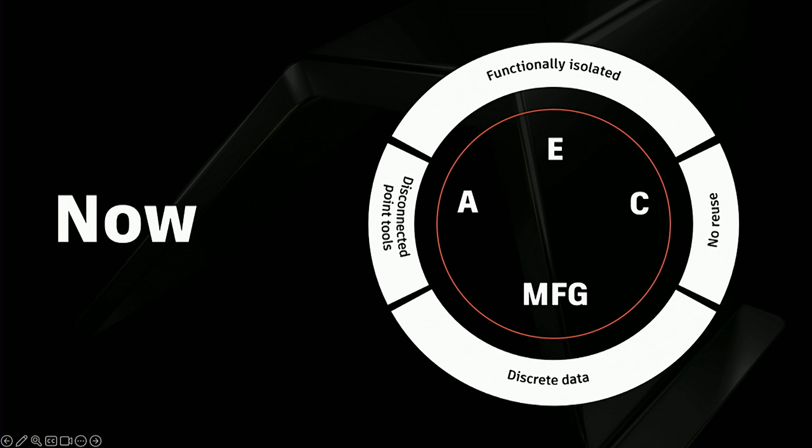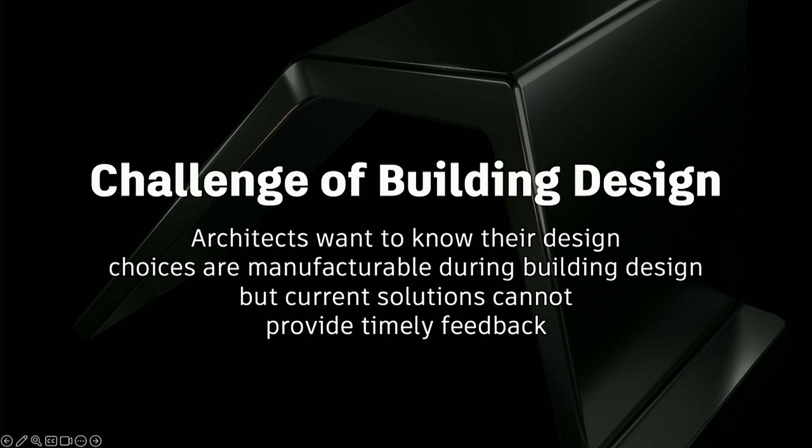We've also seen companies starting to adopt industrialized construction to overcome these challenges, but the modular construction industry has faced significant failures, and only some of the more resilient companies are still standing today. We see that some of them are struggling to make profit. So achieving scale is challenging, and architects aren't really adopting the design for industrialized construction principles. We think architects need to be equipped with the tool sets for industrialized construction in order to move IC on a broader scale.

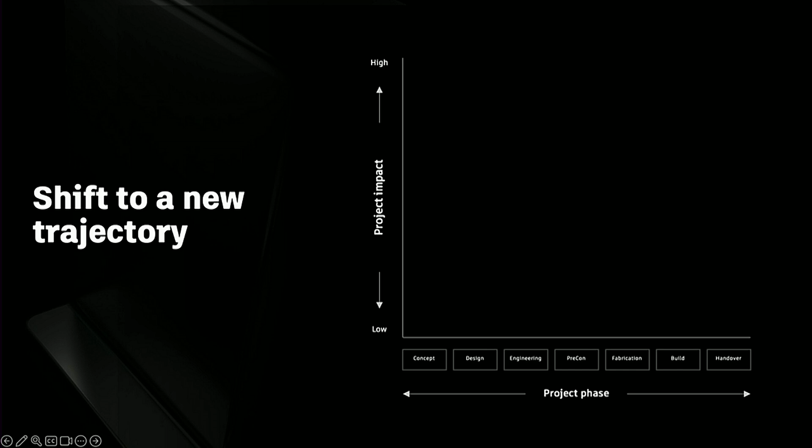With this, there is a need for a shift in our approach to the way we design buildings. Typically, if you look at the curve, the ability to influence design and building cost is high during the early stages of design, program definition, and conceptualization, and choices made during this stage typically make or break the project down the line.

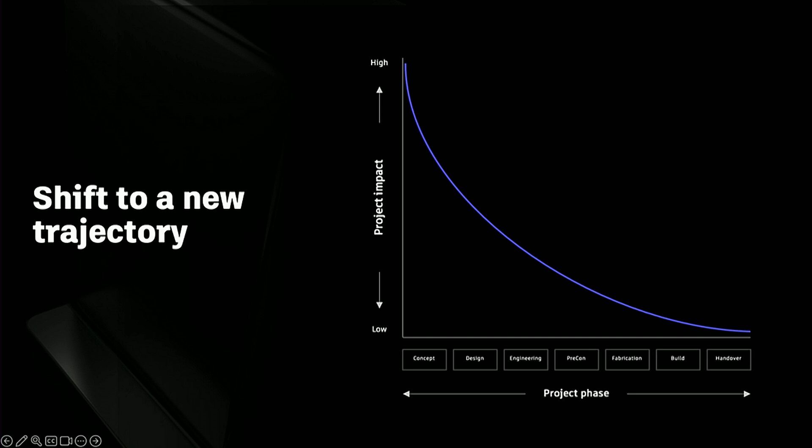The challenge with traditional building methods is that certainty is very low during design because every project is a blank slate and you're starting from scratch. Designers would typically capture design intent with placeholder content at the very beginning, and all the other details are authored much later down the pipeline, which would be complex or costly to change directions at that point.

However, with using industrialized construction, we can start projects with chosen suppliers and known manufacturable components and building elements. This is what we're calling productization. Productization allows architects to use components and make choices that are validated early on during the design process, and this has a downstream impact of eliminating manual, time-consuming processes and decision-making, because these tasks are performed with the components or the products in mind.

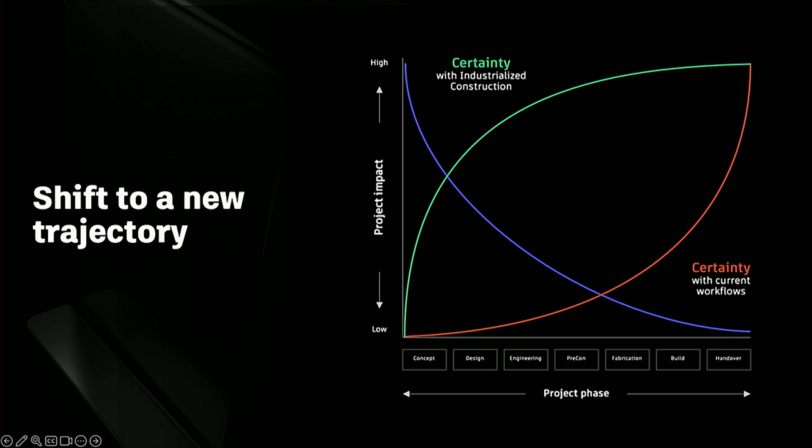So to just share our current landscape at Autodesk, how do we enable our customers to design with productization in mind? We have the Autodesk Informed Design Platform, which seamlessly connects the dots from product engineering to design customization, and finally to production outputs.

So the workflow essentially starts with the product engineer at the publish phase, where they create parametric models, set BIM contents and rules, and then publish the product for design use. And then it's transferred to the designer during the customize phase, where they adapt the product to project requirements, integrating them into the entire project and prepare them for production.

And then in the last phase, the production engineer finalizes project selection and generates the necessary information, so your fabrication models or documentation, bill of materials, shop drawings, and so on. And all of this is integrated in the Autodesk Construction Cloud.

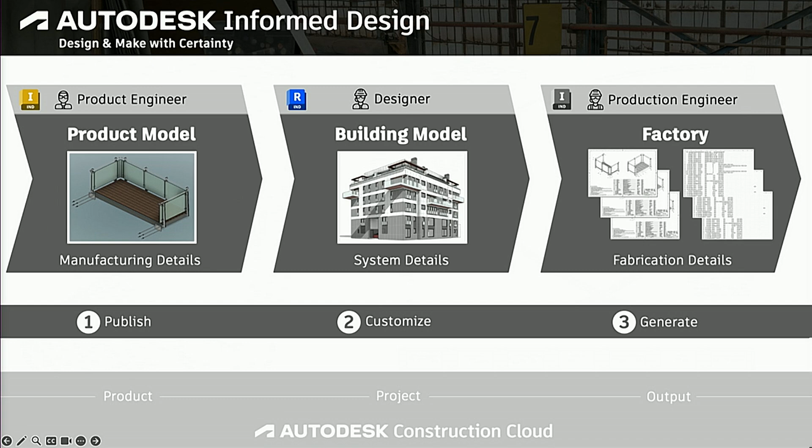So the Autodesk Informed Design is available as a plugin for Revit and Inventor. That was actually just launched today, so please check it out and let us know.

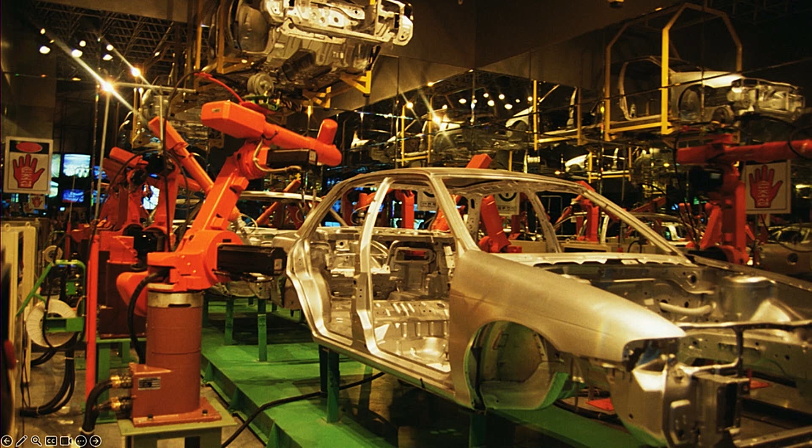But this workflow is definitely inspired from industrial practices like standardized design and assembly and efficient supply chain coordination, as seen in shipbuilding or automotive industry.

However, it's essential to note that industrialized construction does not equal manufacturing. So it's not the same. Unlike ships or cars, buildings are rarely identical, and they often need to be tailored to the unique requirements of the site, the owners, the end users, and all of that. So while we apply the principles of shipbuilding precision and automotive efficiency, we must adapt them to the world of the versatile construction industry, which leads me to the plans that we have for the future at Autodesk Research.

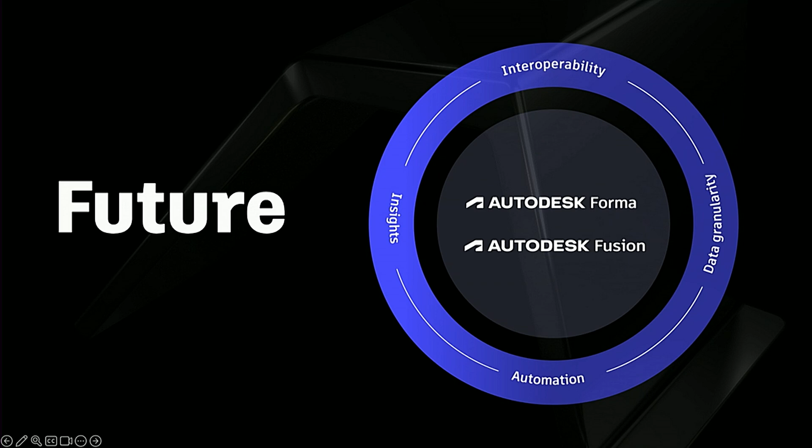We plan to transition from discrete products to a more seamless industrialized construction workflow experience, sharing granular information and data between all our industry clouds, so Forma and Fusion, supported by the Autodesk platform services. So this is where our research starts at Autodesk.

Our research aims to de-risk a future that industrializes high-mix building products, both in complexity and variation, for use in new construction as well as existing buildings, retrofitting existing buildings.

We are abiding by 4 basic principles, which we think is necessary to think about in the industrialization of construction. First being that industrialized construction doesn't start on the construction site, but with how the buildings are designed. So this is one of the main areas we are currently tackling.

Also, industrialized construction is not only about building housing in a factory. There's a spectrum of ways that construction is automated that extends from the factory to the construction site. And then in order to move from a factory setting to a construction site, we know that there's a lot of dynamics associated with an unknown environment, so things like the land, existing surrounding buildings, and so on.

So we know that it's important to digitize all of that, digitize the IC environment before we can move to the site. And our last principle is human at the center of it. So we know automation is not all about the machines. It's about the people that we are engaging in the automation process.

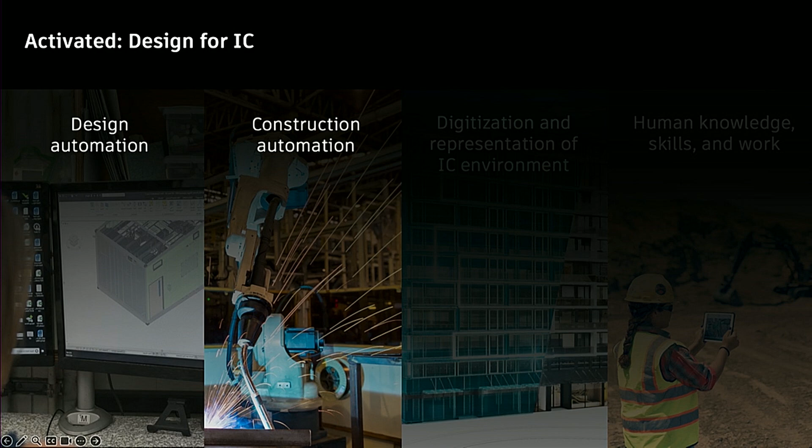As mentioned already, the AEC industry operates on a disconnected project-based operation model, and at a different scale, our software is also disconnected. For instance, the complexity required to pass information from Revit to Fusion. So one of the things we're trying to do is close the loop using Autodesk Data Exchange from design to production through manufacturing services.

Here is a more detailed diagram of our workflow, starting first with the design stage, where we have a design with a low level of development, LOD 200 to 300, and then look into the component specifications and requirements to generate fabrication geometry on individual building systems.

And then we have the manufacturing phase, where we're focusing on passing the information from design to manufacturing services, where we then generate all the manufacturing data and have all of that ready for production.

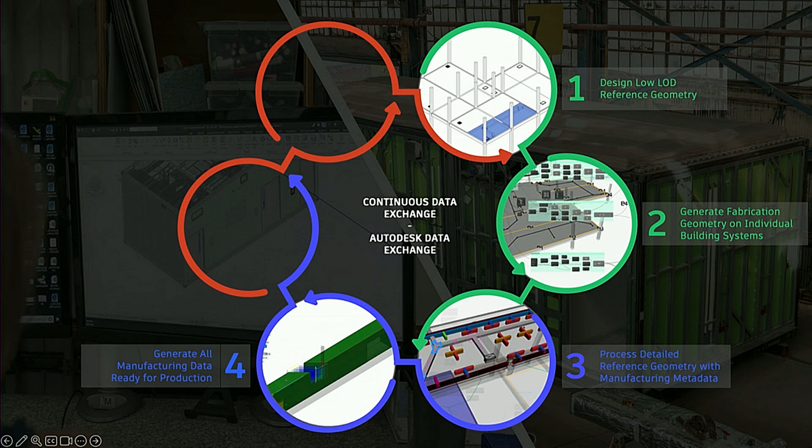So from that digital twin, we move on to the physical space, which is the production stage, and we can predict production workflow graphs and supervise the process and everything, including the assembly of the product in a factory setting.

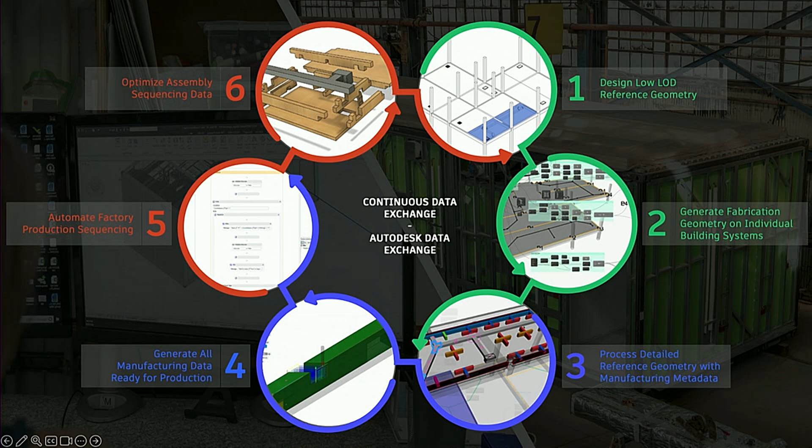I'll walk you through the workflow in more detail, but using this workflow, we tested it with a prototype in the Boston Technology Center, which is a simple wooden floor cassette featuring an HVAC system. This is not your typical conventional approach in practice, but it was just a little research to test our methods.

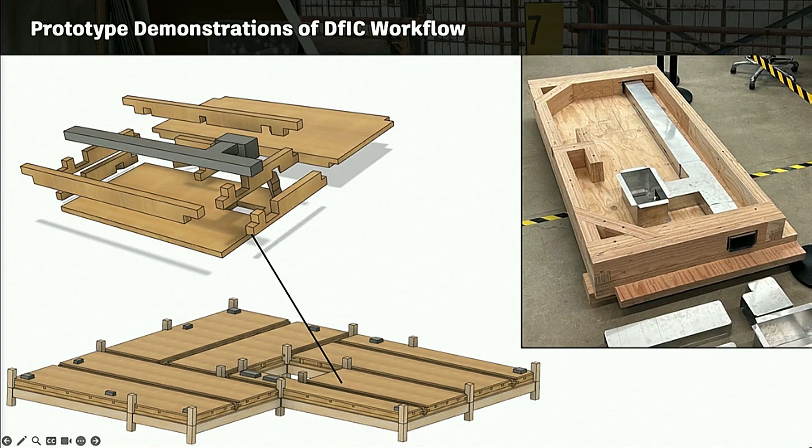So diving in first with the design piece. As we all know, there's a diversity of applications and components in industrialized construction, which leads us to a diversity of materials or combination of materials that require several manufacturing technologies.

So the idea of the design service is to move from a low LOD, a low level of development design, to a high complex component that requires deep knowledge of the material, the manufacturing and production capabilities, and the assembly, all at the design stage.

So the intent is to help designers move from low LOD design to a multi-scale design optimization. So to enable designers, we are embedding manufacturing constraints very early on in the design.

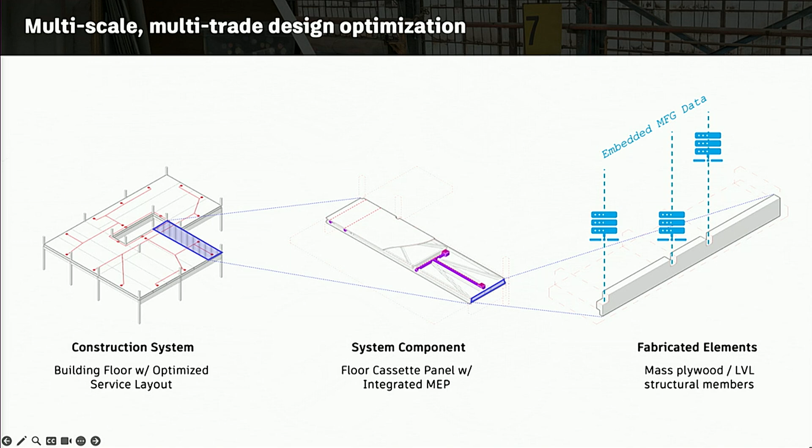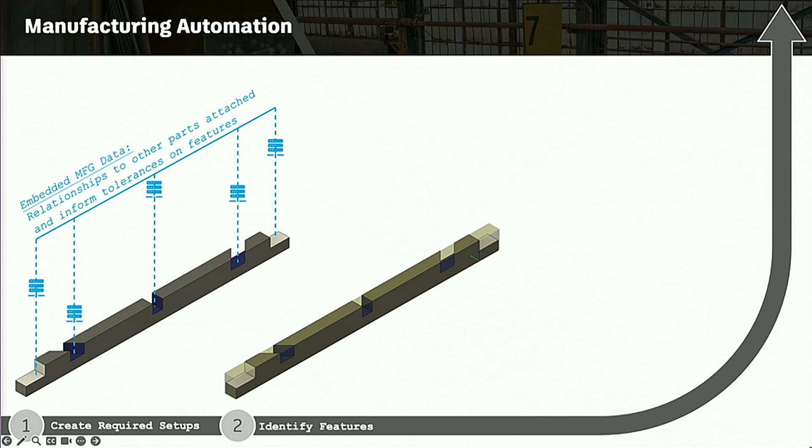Moving from design to the manufacturing environment, we are using the Fusion API to separate the assembly into individual parts, and then use metadata to identify the machine features, and specific features in the individual components that would require manufacturing attention, then calculate the tool path, generate the NC code, and package it with the machine data, and provide it to the production services for manufacturing.

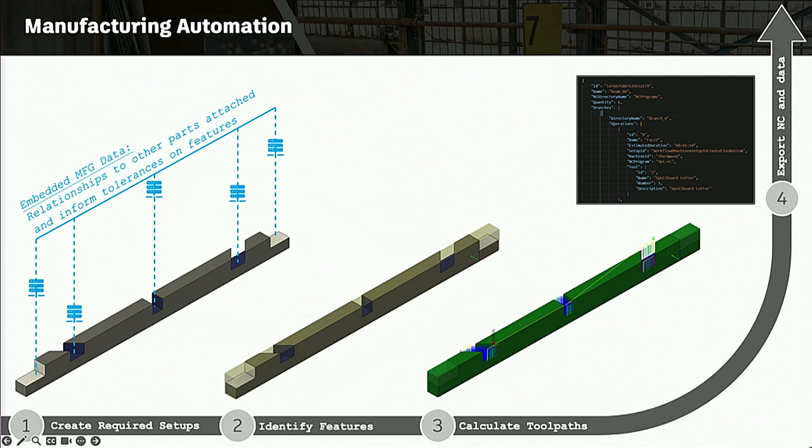So this just takes the design, pieces it into individual components, identifies features, calculates the tool paths, and you can package that NC code and machine data for production.

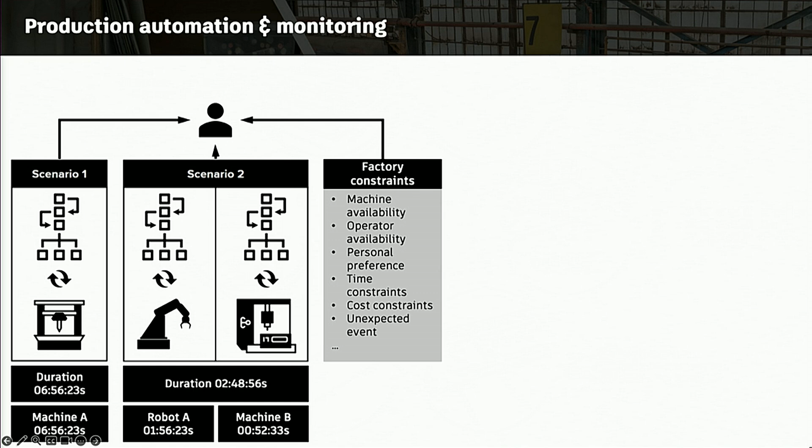So the final step is to move from the digital environment, design and manufacturing, to the physical one, which is our production. At this stage, we have all the list of components and elements that need to be fabricated. So we developed a tool that analyzes all design and manufacturing data to produce multiple production scenarios. The tool considers things like the availability of machines, the capacity, optimization, cost, and so on.

And the tool also creates a workflow graph, as we can see in the video, that represents the production flow of a factory and can also monitor the activities in the factory and identify any gaps.

We're actually able to have some of our team members in France remotely monitor the initial prototype produced in Boston. So our goal is to enhance production prediction and collaboration.

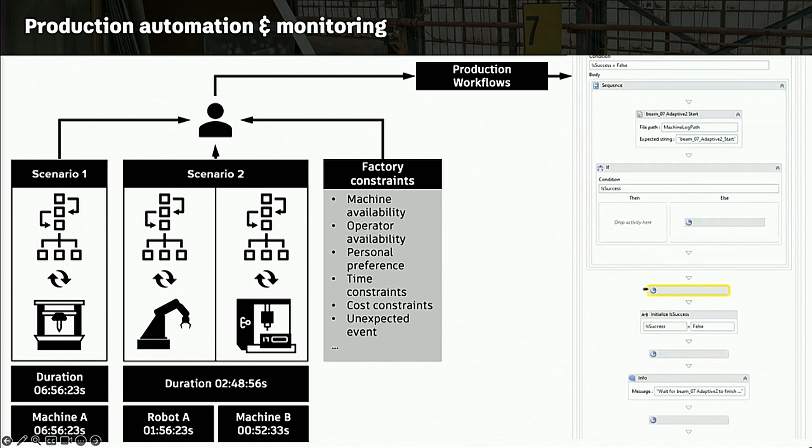So in a nutshell, that's the workflow. You have your design services, your manufacturing services, and your production and assembly services.

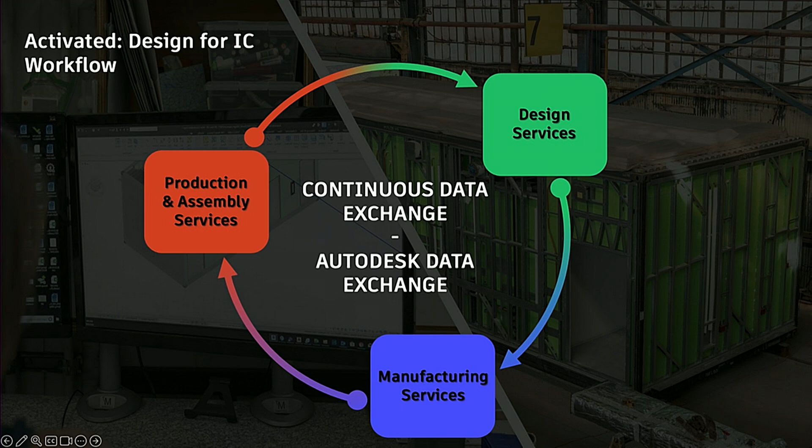The diversity of applications in industrialized construction doesn't allow for a single solution or workflow to respond to all the vast applications, the vast materials, and all of that. But we believe that we can leverage the platform services or solutions that we have at Autodesk and cloud computing technology to provide generalizable services for our customers to build their own workflows.

So this is where we're starting our research on industrialization of construction, to be able to provide architects with the tool set to design for industrialized construction.